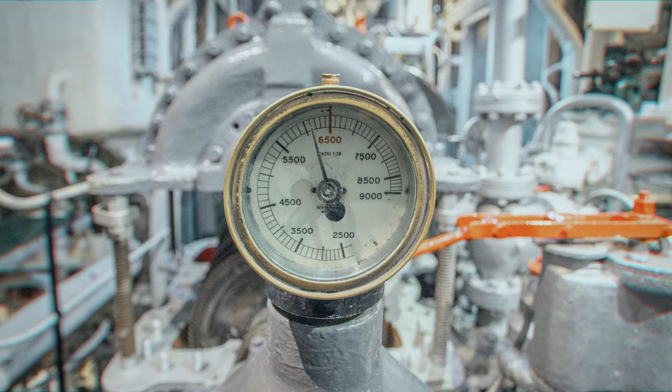The Titan sub was doomed long before its final dive. Stockton Rush, the founder of OceanGate, knew it was structurally unsound. He watched it crack under pressure, and he heard everyone tell him to stop. But he ignored the warnings until Titan's 88th dive, when the sub imploded on him and 4 other passengers: businessman and adventurer Hamish Harding, Titanic expert Paul-Henri Nargeolet, businessman Shahzada Dawood, and his 19-year-old son Suleiman Dawood.

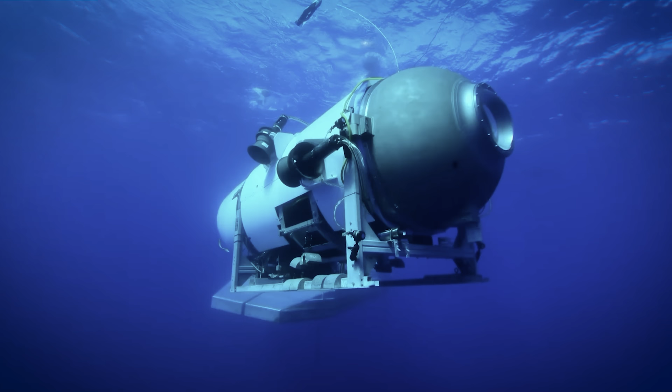Titan sank because, for Rush, turning back had become impossible. Rush founded OceanGate in 2009 with an ambitious and brutally expensive goal: make the deep ocean profitable. He would start by taking paying customers deeper than any civilian submersible in history.

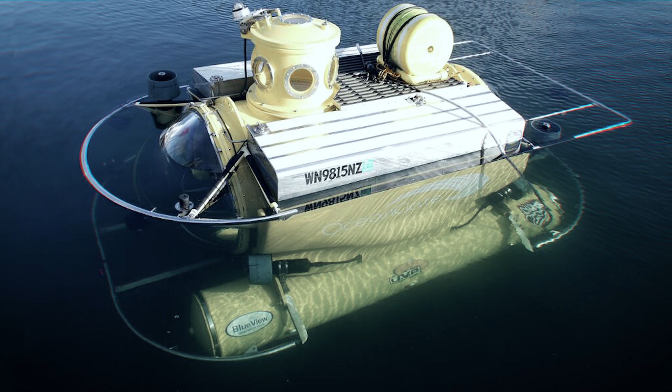At first, the company chartered dives using a small, used submarine called Antipodes, renting it out to researchers and academics. But it could only go 300 meters underwater, and Rush wanted to go at least 4,000 meters deep. But no existing subs could take 5 civilians to the bottom of the ocean. To make the business work, Rush would have to build his own.

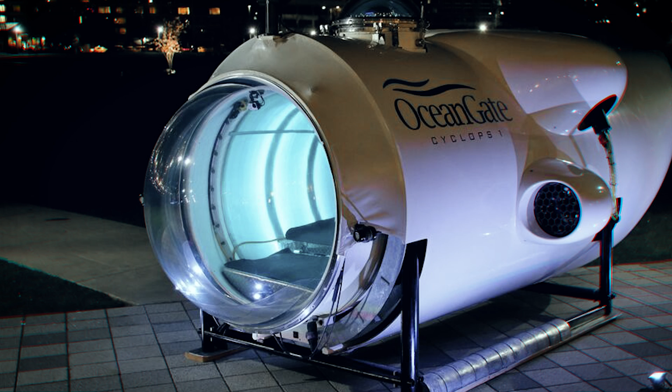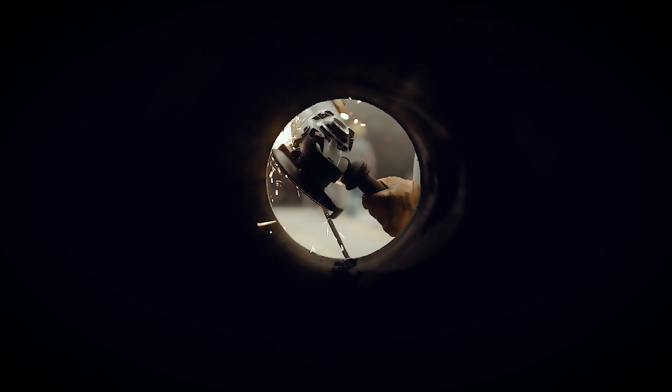In 2015, OceanGate revealed its first custom-built submersible called Cyclops 1. This was a proof of concept for Rush's vision for a new kind of sub that could be operated from a cheap support ship instead of an expensive research vessel. Cyclops 1 followed established engineering practices and had a steel hull. It could dive up to 500 meters.

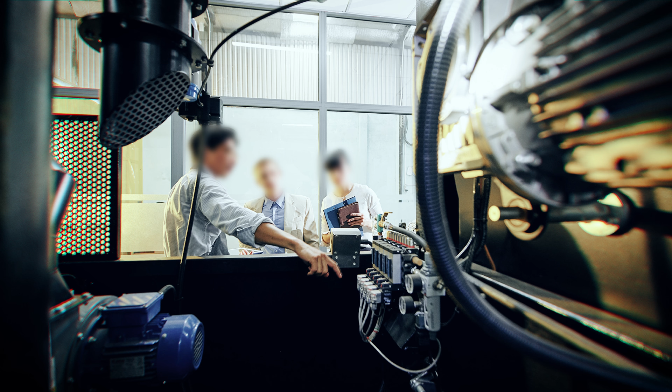But this was 3,500 meters short of Rush's goal, and he quickly discovered that the deeper he wanted to go, the worse the economics became. Deep-sea engineering rewards caution, redundancy, and years of expensive testing. OceanGate could not sustain that kind of development cycle.

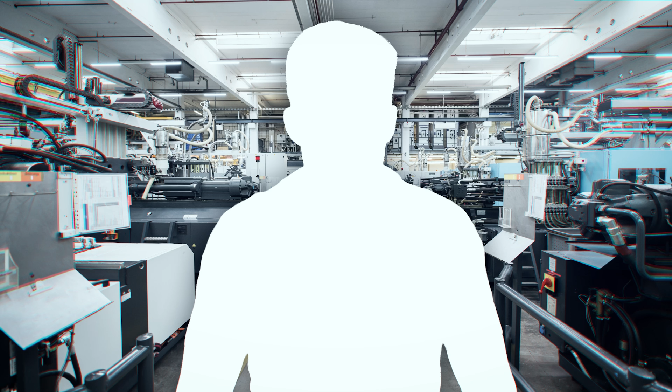Scaling back the vision would have meant admitting the business itself might never work, and that was something Rush appeared incapable of doing. By 2016, conventional engineering no longer fit OceanGate's business model, so Rush made a decision that would alter the course of OceanGate and his life forever. He began to see the rules of deep-sea engineering not as limitations, but obstacles to overcome.

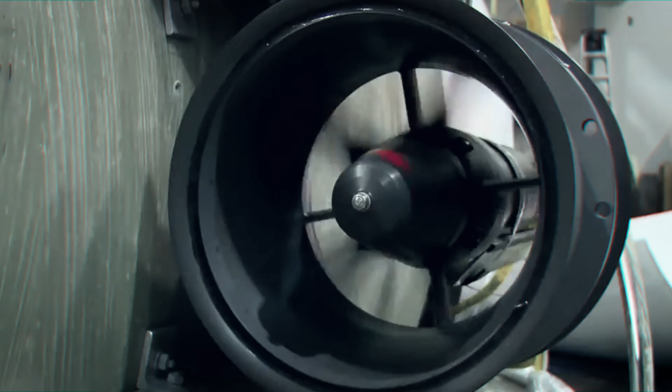In 2016, Rush began to build Cyclops 2, later renamed Titan. Rush wanted to reach the Titanic wreck, and to do so would have to solve problems that most engineers avoided altogether. Deep-sea subs are often spherical because that shape distributes the crushing pressure of the ocean evenly in every direction.

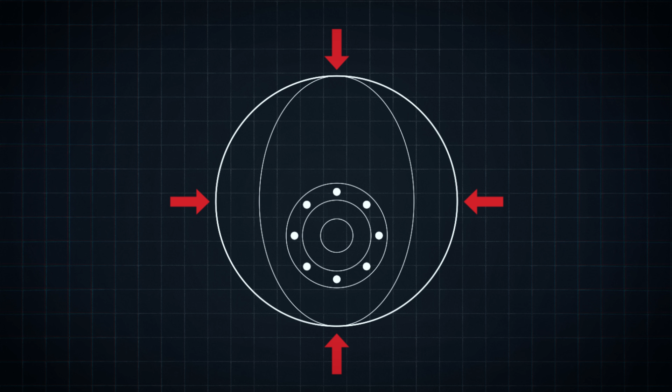But spheres are cramped, and Rush wanted room for 5 passengers. So Titan was designed as a long cylinder instead. The shape was more practical for tourism, but far harder to protect from deep ocean pressure.

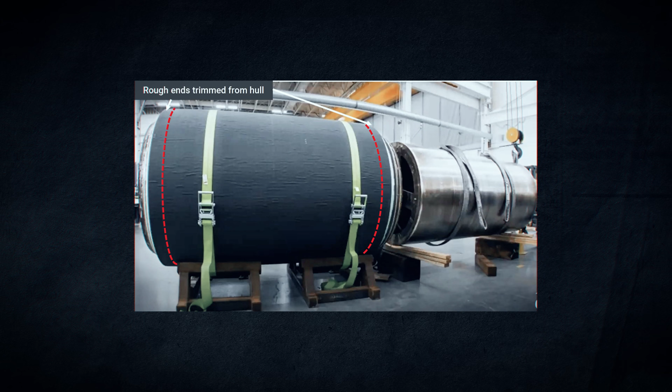Rush made an equally unconventional choice with the hull material. Most deep diving submersibles use titanium or steel, because they behave predictably under compression and can survive repeated dives without accumulating dangerous internal weaknesses. Titanium is strong, light, and behaves isotropically, meaning that it responds to pressure the same way in every direction. So why did Rush choose carbon fiber?

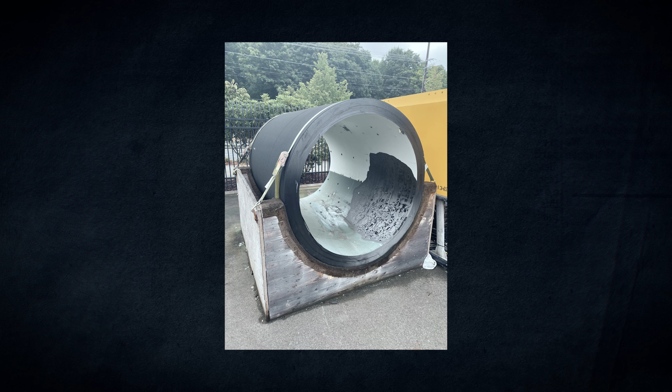He considered it innovative because it was lightweight and unlike anything being used in a crewed submersible at those depths. One of the biggest pulls for Rush was that the deeper carbon fiber goes, the more it wants to float upward. This meant he could use low-powered thrusters, a smaller support ship, and a smaller crew for each dive.

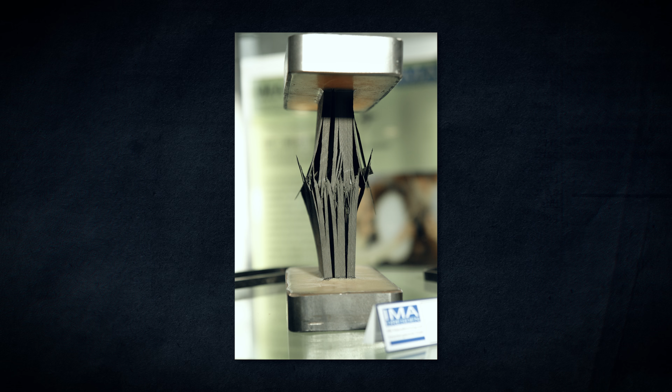But it also had a fundamental drawback: damage accumulates over time. A carbon fiber hull can appear intact until the moment it fails. Rush understood this trade-off, but carbon fiber solved many of OceanGate's time and money problems.

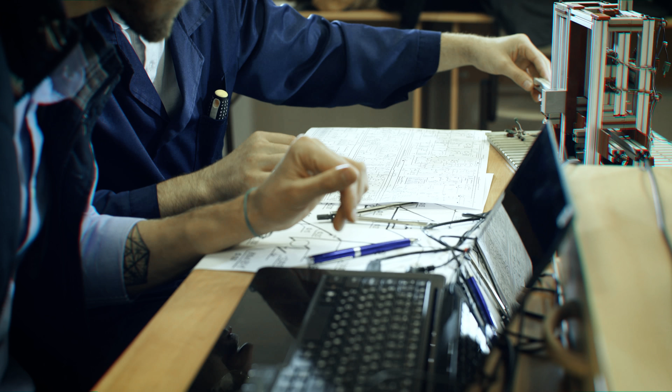None of these decisions automatically doomed Titan. A cylindrical carbon fiber hull can work if it's engineered conservatively, tested rigorously, and its life cycle managed carefully. Rush consulted multiple experts during development. Boeing recommended a hull thickness of 9.3 inches. Rush ignored them and built Titan's hull at about 5 inches.

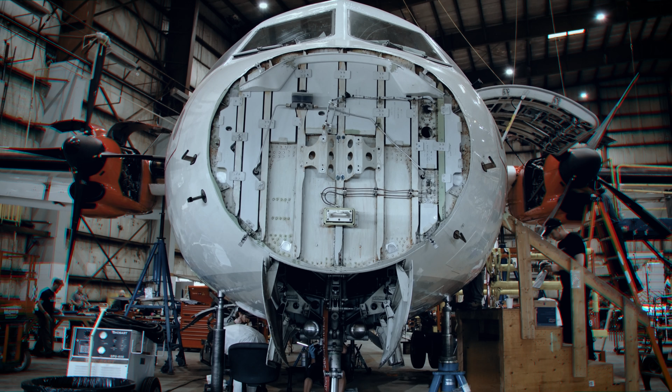The deeper problem was not the shape or the material. It was Rush's growing belief that established deep-sea engineering was too cautious. Rush came from a different field. As an aerospace engineer, he saw carbon fiber as a symbol of progress, while many veteran submersible designers saw it as a risk. To Rush, Titan was becoming proof that he was right and the experts were wrong.

Building Titan was only the first hurdle. Rush now faced a harder challenge: to convince everyone else that it was safe. The early testing produced mixed results.

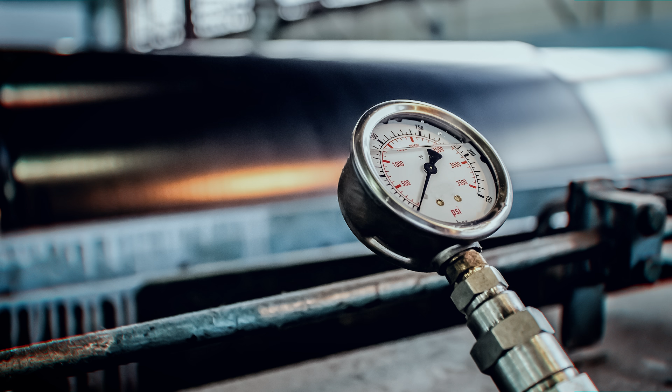The initial pressure test failed, forcing OceanGate to compromise and redesign the end caps to be made of titanium instead of carbon fiber. A later test on a 1/3 scale model successfully survived pressure equivalent to a depth of roughly 4,200 meters. But a scale model is not a crewed submersible, and not everyone was willing to let that distinction go unaddressed.

In 2018, the Marine Technology Society's Committee on Manned Underwater Vehicles drafted Rush a letter, signed by 38 industry experts, urging him to have Titan classed by an independent certification organization. OceanGate's own marketing claimed Titan would exceed industry standards, but Rush had no intention of inviting that kind of scrutiny, except for one moment in 2019 when he approached Lloyd's Register.

They refused to class the sub. But credibility was a problem. Online, Rush claimed that the sub was designed and engineered in partnership with NASA, Boeing, and the University of Washington. What he didn't mention was that he consulted all three, but ignored all of their recommendations.

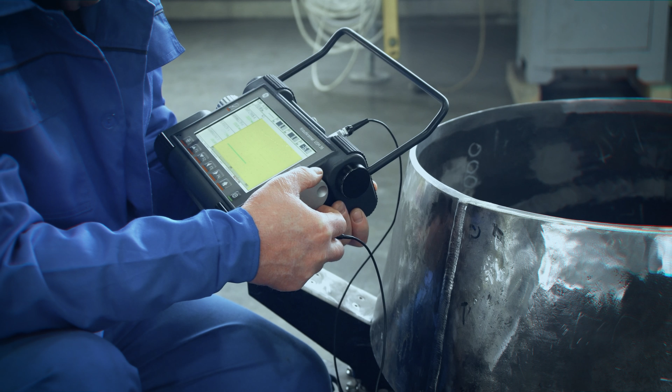The strongest challenge to Rush came from inside OceanGate itself. Director of Marine Operations David Lockridge filed a quality control report warning that the critical non-destructive testing of Titan's carbon fiber hull had never been performed. Without it, there was no reliable way to detect voids, delamination, or other defects that could cause catastrophic failure to the carbon fiber hull.

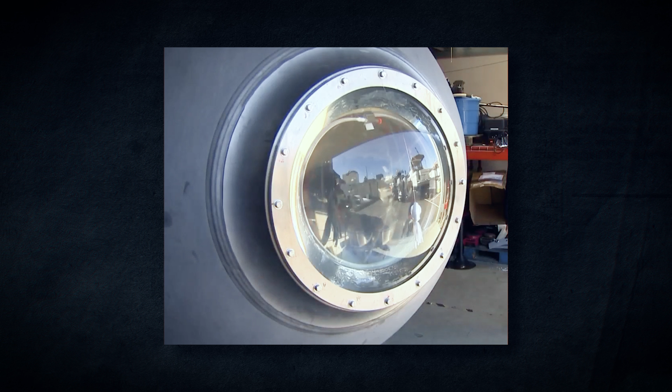Lockridge also discovered that Titan's viewport, a 15-inch diameter acrylic window, was rated for only a fraction of its intended operating depth, 1,300 meters, rather than 4,000 meters. This fact alone made piloting Titan to the Titanic wreck pure madness in its current state.

For Rush, these warnings represented more than engineering disagreements because they threatened the entire company's existence. Lockridge was fired. He filed a whistleblower complaint with OSHA and was met with a lawsuit from OceanGate, who claimed Lockridge improperly shared trade secrets. OceanGate then lied about the reason he was fired. Once again, Rush crushed a legitimate warning to continue development.

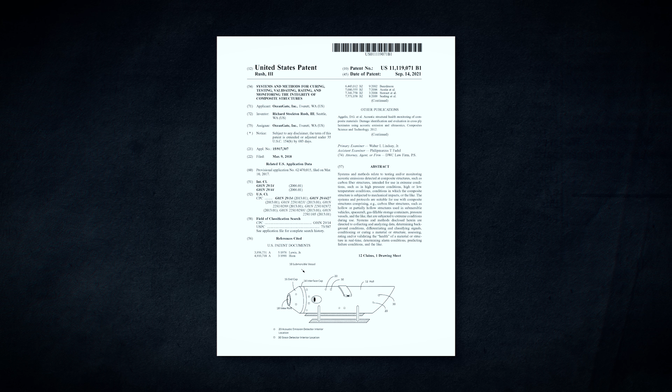Rush's answer to all of these concerns was bewildering. As a substitute for testing and certification, Rush patented a real-time monitoring system, also known as RTM. He claimed that this system could listen for damage occurring inside the carbon fiber hull in real time and provide advanced warnings before implosion. To him, Titan did not need the same level of testing and certification as conventional submersibles. The vessel could monitor itself.

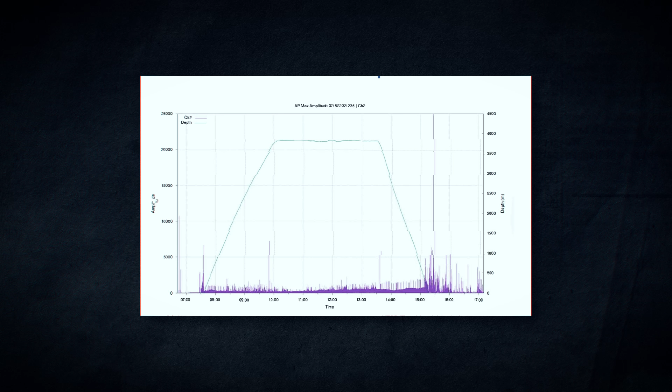In reality, many experts believed any warnings would come only seconds or milliseconds before implosion. But then came the moment that changed everything.

On December 10th, 2018, Rush locked himself into the Titan, as it was only able to open from the outside. He personally piloted the sub to roughly 4,000 meters and returned safely. That successful dive was the most consequential event in Titan's history, because it appeared to validate years of Rush's controversial decisions. Every warning that had come before now had to compete with a simple fact: Titan succeeded.

Turning back was becoming harder than ever. By April of 2019, the dangers of Titan were no longer hypothetical. That month, the vessel descended 3,760 meters with a crew of 4. The dive was a success, except for the reported cracking and banging noises heard by passenger and engineer Carl Stanley.

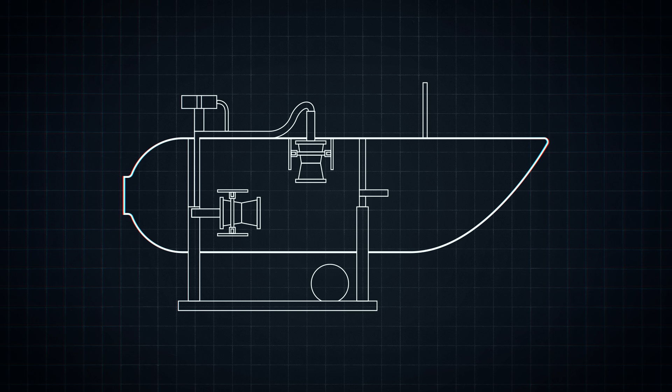The original carbon fiber hull was showing signs of cyclic fatigue, meaning that damaged carbon fiber accumulates over repeated dives, was beginning to appear. Stanley told Rush, "I think that hull has a defect near that flange that will only get worse." After more testing, OceanGate reduced Titan's maximum operating depth from 4,000 meters to 3,000. This was a remarkable admission. The submersible could no longer safely reach its end goal, the Titanic.

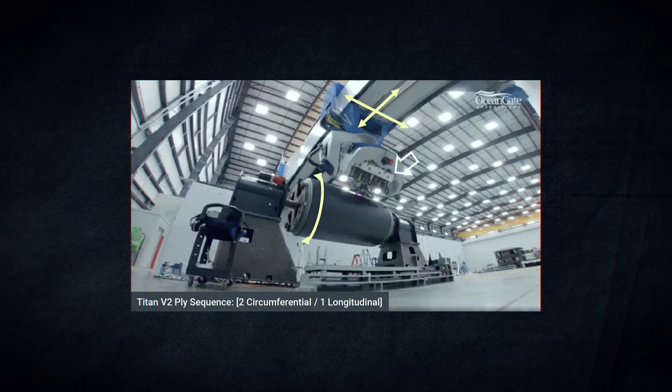This should have been a moment of reckoning. After years of warnings, testing disputes, and engineering controversies, Titan's most important component appeared to be failing exactly as critics feared.

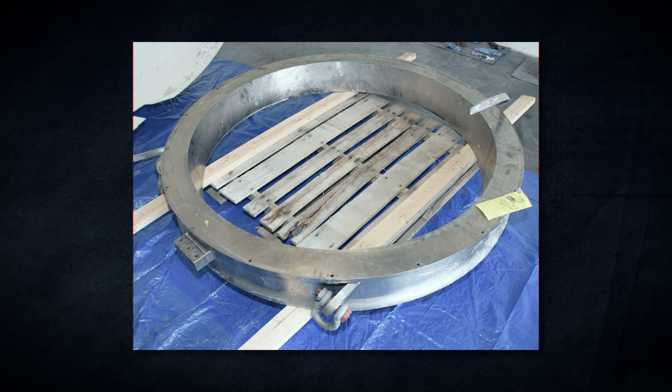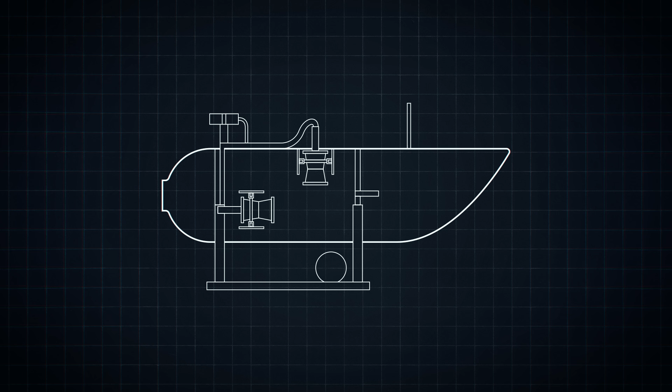Every major setback created another opportunity to reconsider the project. Instead, each problem seemed to strengthen Rush's commitment to it. The Titan had effectively failed its mission, yet rather than abandon the design, Rush put the pieces back together and pushed forward. Titan was headed to the Titanic.

In 2021, Titan began taking paying customers to the Titanic wreck. Rush organized 10 expeditions over the next 2 years, each carefully framed to avoid the rules governing commercial passenger operations. Clients were called mission specialists. The dives were labeled research. The expeditions themselves were a catalog of warnings.

The sub often lost contact with the surface for hours during descent. Even worse, on multiple dives, Titan never reached Titanic at all. Titan's sonar could only see about 100 yards ahead, where 400 to 500 was standard. Another corner cut for cost.

Then came a more serious warning. On one dive, the sub became stuck on the sea floor for 4 hours. Titan's passengers were sealed inside at a depth where rescue was impossible. The mission ended without disaster, after about 20 hours total submerged, but it also ended without Rush changing course.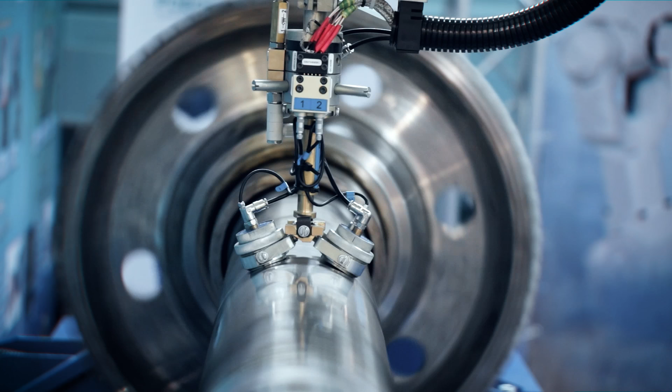Each time the sub surfaced, Rush called it a success. He had no other option. After years of testing, of proving his critics wrong, walking away from the carbon fiber hull meant admitting the experts had been right the whole time. At 61, he could not start over. And without the carbon fiber, there was no OceanGate.

He insisted that the classification systems were restrictive, that they slowed innovation and added cost without real safety benefit. In practice, that left only one thing testing the hull: the dives. On dive 80, the Titan failed that test. Everyone on board heard a loud bang. That sound could only come from the carbon fiber layers beginning to separate.

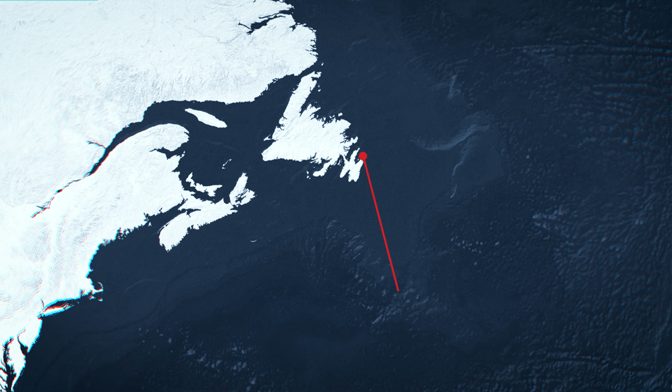On June 18, 2023, Titan began its 88th descent. Rush and the sub's passengers, Harding, Nargeolet, Dawood, and his son, traveled to the wreck site on a ship called Polar Prince. This ship was smaller than usual, so the entire way to the site, the sub was towed behind the vessel, instead of riding on deck. Being dragged through open ocean like that almost certainly stressed the hull.

The dive continued regardless. At 8:55 a.m., Titan slipped beneath the surface and began the 2-hour journey to the Titanic. Every 5 to 10 seconds, Titan sent a positioning ping to the support ship. Nothing appeared unusual. Rush had made this trip dozens of times.

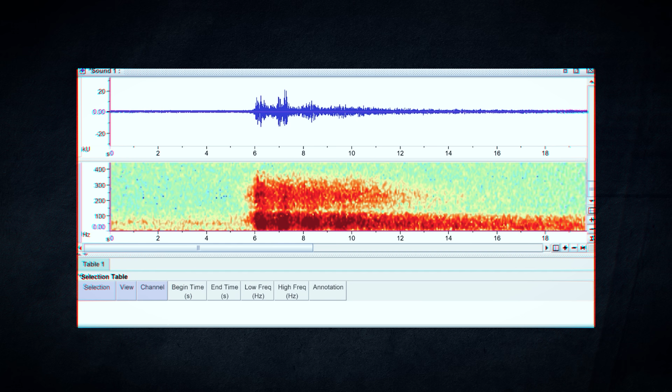About an hour and a half into the journey, people on the Polar Prince heard an alarming bang sound. No distress call followed. However, moments afterward, at 10:47 a.m., Polar Prince received a delayed message from the sub, dropped 2 weights. The Titan was 3,346 meters underwater. This was the last text message they ever received.

The message suggests something haunting. After years of insisting his real-time monitoring system could detect damage before a catastrophic failure, it appears Rush may have received exactly the warning he prepared for.

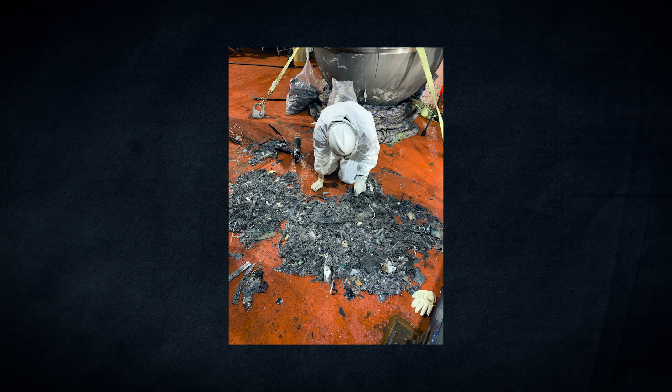It's likely that Rush recognized something was wrong and attempted to ascend, but in milliseconds, the North Atlantic collapsed inward with thousands of pounds of pressure on every square inch of the vessel. The carbon fiber hull failed exactly as critics had feared it might, suddenly and catastrophically. All 5 passengers lost their lives instantly.

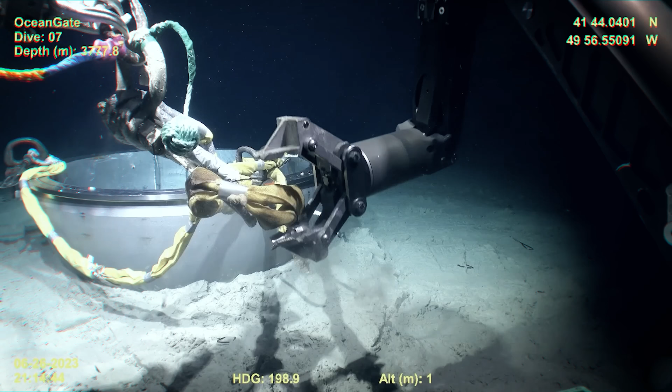4 days later, search teams located the wreckage approximately 500 meters from the bow of the Titanic. Rush had finally tried to turn back, but he was many years too late.